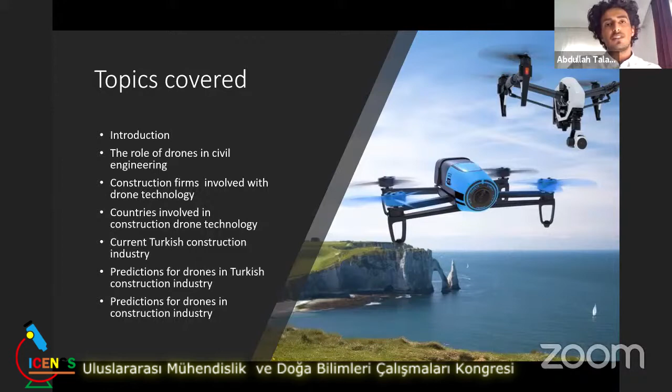Beginning with drones, drones are unmanned aerial vehicles that are being piloted with no pilot aboard. They are being referred to as drones, and they are an emerging technology with many applications in different fields, especially in the civil engineering field.

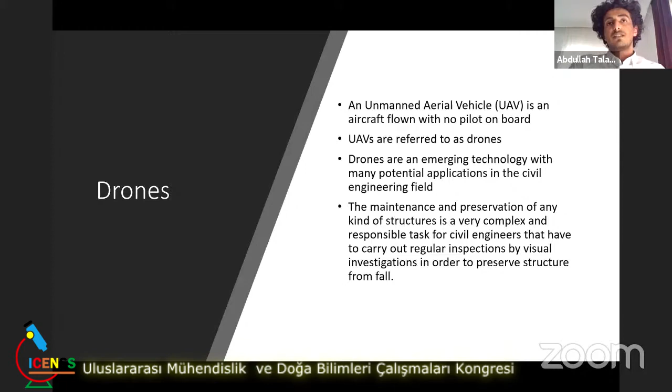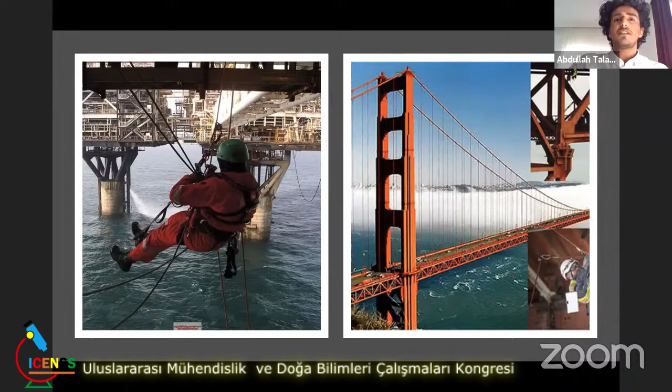So the application of drones in these situations will be much easier, and it will save time, and it will provide reliable and safe data for construction purposes. This will lead us to the discussion of benefits of drones in the construction industry.

The benefits of drones in the construction industry go as early as the pre-planning, designing, and bidding phases of the project. Drones can provide reliable information about the topography of the work site, through doing digital terrain modeling and digital surface modeling, which is invaluable for the building and excavation works and the storing of materials.

Then we have planning and design, which is another benefit of drones. Drones can help in creating building information models and can help in creating CAD models for design purposes. After that, we'll pass to the earthworks.

Drones are capable of doing volumetric analysis to calculate the amount of earthworks required for a project. And finally, the inspections of projects, using technologies like LIDAR, which is remote sensing pulse laser, it can detect any thermal signs, moisture, or gas leakage.

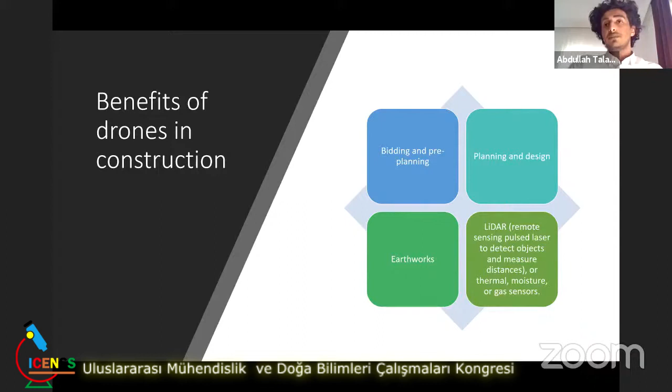Now we will begin talking about the construction companies that are involved in drone technology. From our research, we found that the United States has the most number of companies that are using drones in their work, followed by the UK.

We found that 73% of the construction companies involved in our sample generate revenues exceeding $1 billion, which means these companies are capable of investing in innovation and integrating new technologies in their work.

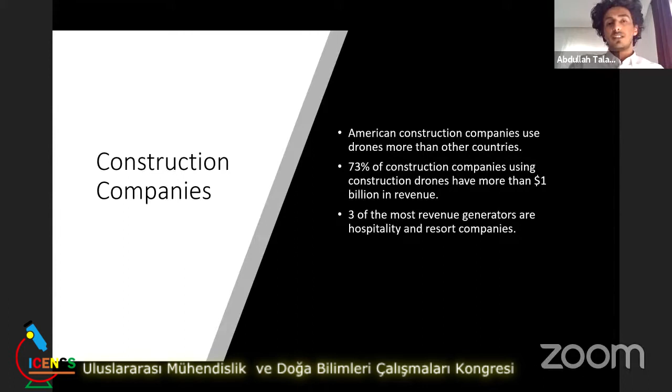Interestingly, we found that 3 of the most revenue generators in our sample are hospitality and resort companies, which indicates that these companies are already using their drones in other applications, and it has less deployment cost to integrate drones in the construction sector.

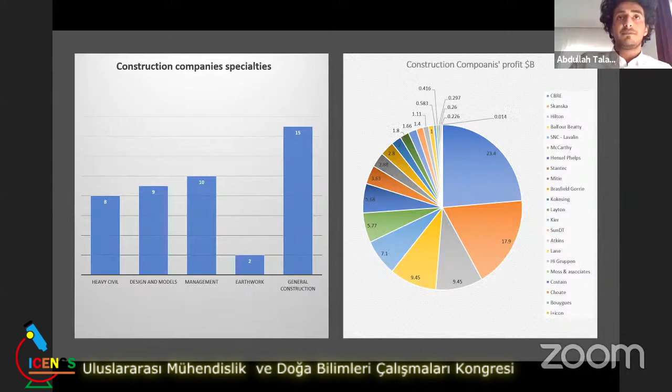Now we will go to drone companies, and once again the United States was the country with the most drone companies involved in our sample, tying with the United Kingdom at 32% each, followed by China, Switzerland, and one other country.

China was the top drone supplier, with DJI being crowned the king of drones, the biggest company supplying drones worldwide. We noticed that most of the drone companies are software companies, 54%, which is due to the ease of investment in the software segment, making it easier to invest in innovations and the technology sector.

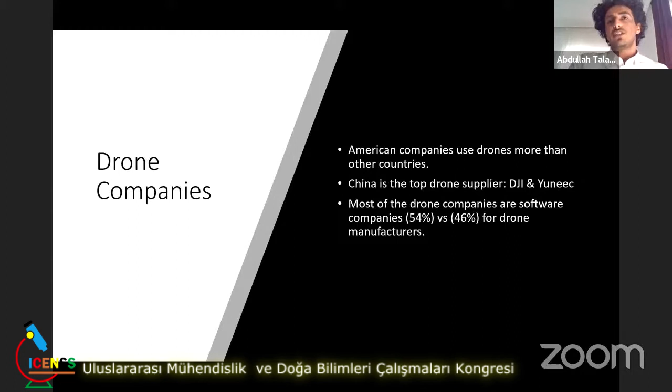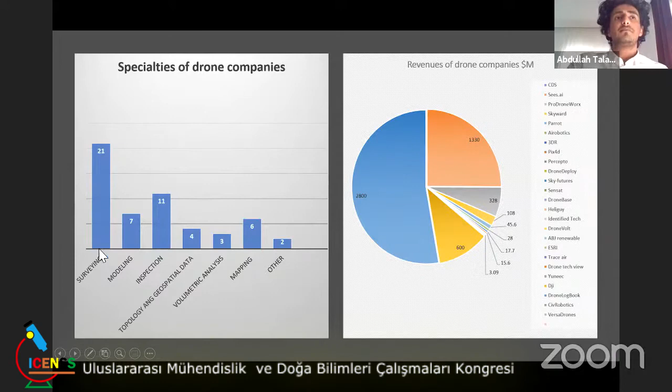The most use of drones in construction companies is illustrated in the left chart. We see that surveying takes the biggest chunk of these usages, followed by inspection, modeling, and mapping.

Now we'll talk about the indices that are correlated to the adoption of drones in the construction industry, related to different aspects of countries.

We will begin by GDP per capita, an indication of the prosperity and welfare of a country, which indicates that this country is able to invest and test new technologies on field. However, we didn't find any correlation between GDP and the adoption of drones. For instance, countries like Qatar and Luxembourg have high GDP, but they have nothing to do with drones in the construction industry.

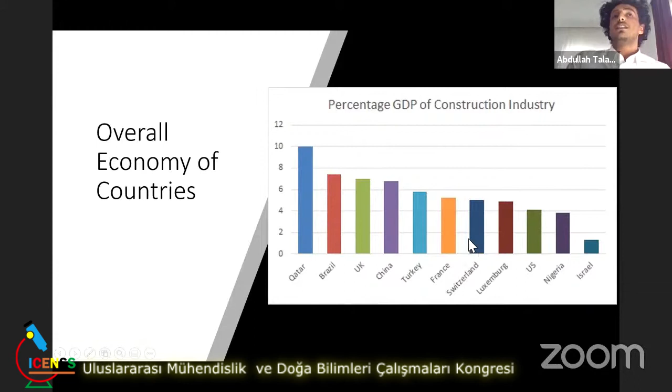Next, we looked at the contribution of the construction industry to a country's economy or GDP. We argued that if this contribution is high, it means there is a booming and competitive construction market. However, we found the United States lagging behind compared to countries like Qatar, which is not a positive correlation regarding the projections we want to make.

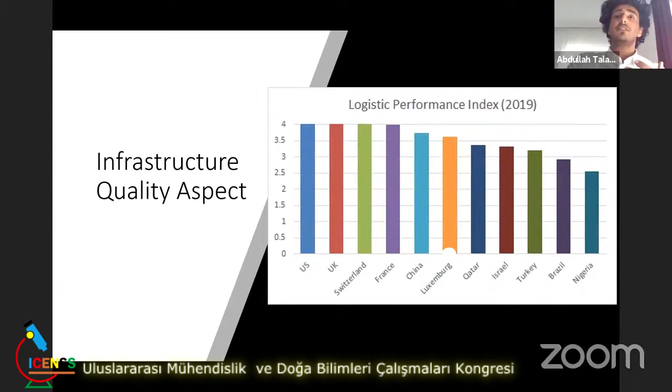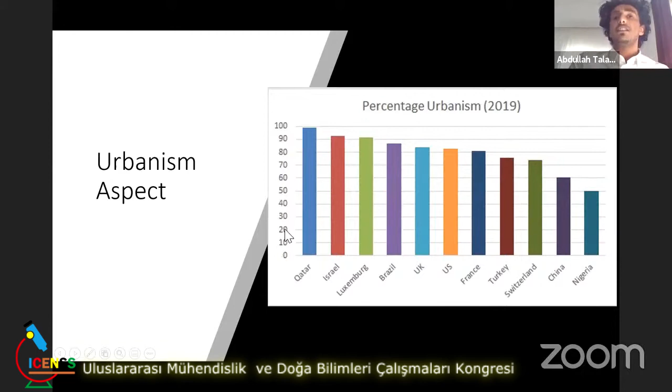After that, we looked at the urbanism aspect. The argument was that a highly populated area with a huge number of densely populated dwellings will require a lot of inspections and maintenance, so drone usage would be recommended. However, we didn't find any correlation in this chart, and this might be because higher populated areas result in a higher number of engineers, and the ease of doing inspections by just hiring engineers to do it.

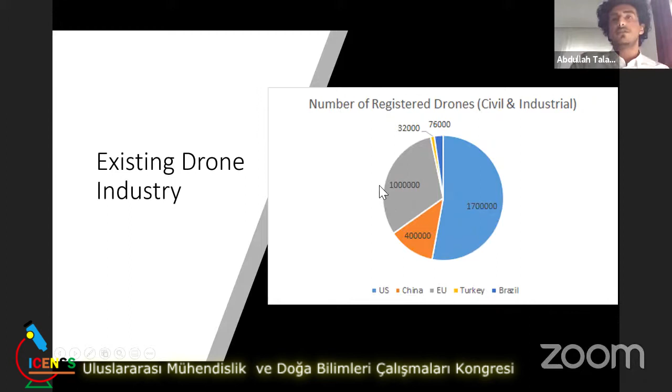Then we looked at the number of registered drones in each country. If a country has a foundation for a technology, like drone technology, that means it's much more likely to adopt this technology in other sectors. Here this checks out: we see United States, China, and the EU topping this chart, and they are already pioneering drones in the construction industry.

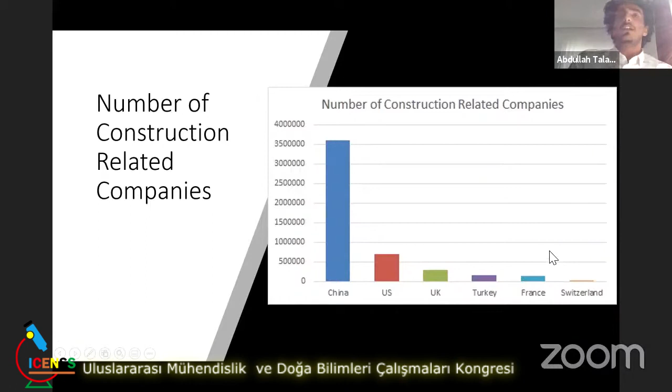Now we considered the number of construction-related companies in each country. The argument was simple: the higher the number of construction companies, the higher the chance of having companies using drones for construction. However, we see countries like Switzerland and France lagging way behind, which doesn't comply with our research. So we didn't make any correlations here.

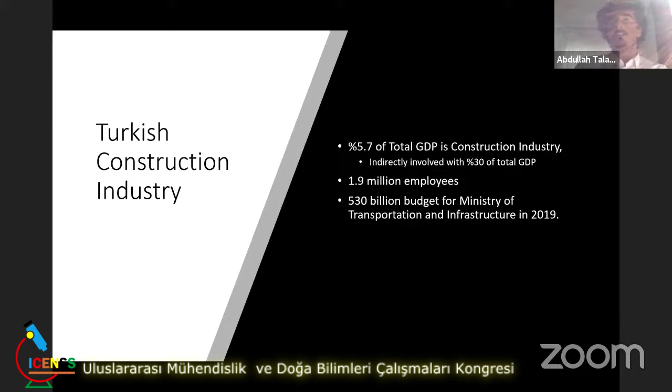Now we'll pass to the Turkish construction industry. The construction industry in Turkey is so important, it accounts for 5.7% of the total GDP of the country, and it's indirectly responsible for 30% of the GDP. It employs 1.9 million people, and an indicator of the importance of this industry is that 530 billion Turkish liras was set as a budget by the Ministry of Transportation and Infrastructure in 2019.

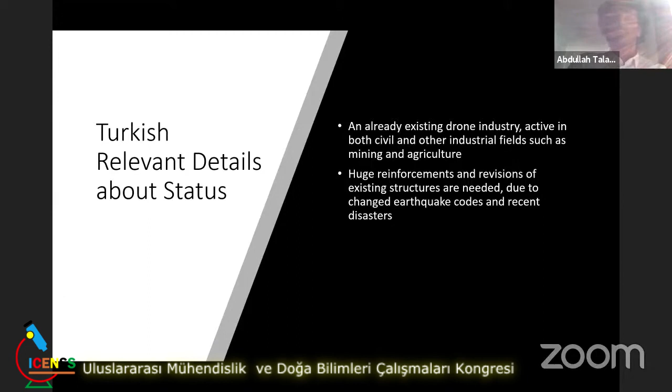Now we go to the current status of drone deployment in the construction industry. They are already being used in many industries, including civil engineering and construction. However, it needs huge reinforcements and revisions to get it up to speed with modern technologies and to make it up to date.

So the application of drone technology is recommended since Turkey is active in doing infrastructure projects, and they have a decent number of registered drones. The Turkish economy, as we mentioned, is highly dependent on the construction industry, contributing a decent amount to GDP. So the implementation of drones is recommended here.

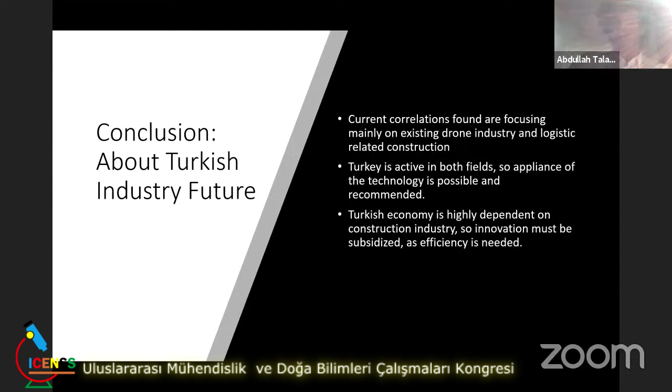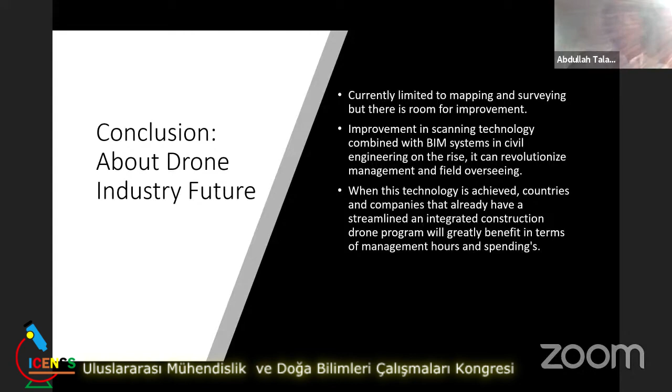So, conclusions about the drone industry in general: drone implementations are limited to mapping and surveying, as we said before, and that's why construction companies in Turkey, or in general, have to focus on investing in developing technologies to integrate, like BIM modeling and inspections, for example LiDAR technologies. When these technologies are used as standard, companies will devise divisions and methodologies to make use of these technologies and make it the norm in the industry.